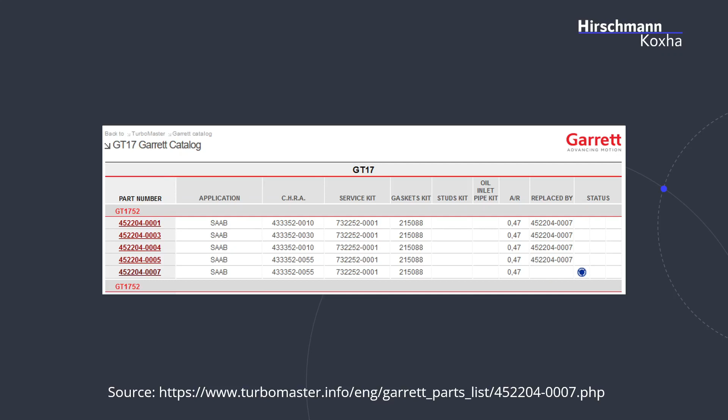Now to the basics. This is a T7 tune. And the engine in this case was a B205E with biopower, so E85, while the base file itself was made for a 2.3 liter engine. Why this matters, we're gonna see it later on. One thing you need to know about the B205E is that it comes with a GT17 turbocharger. And that thing is not really reliable at high mileage.

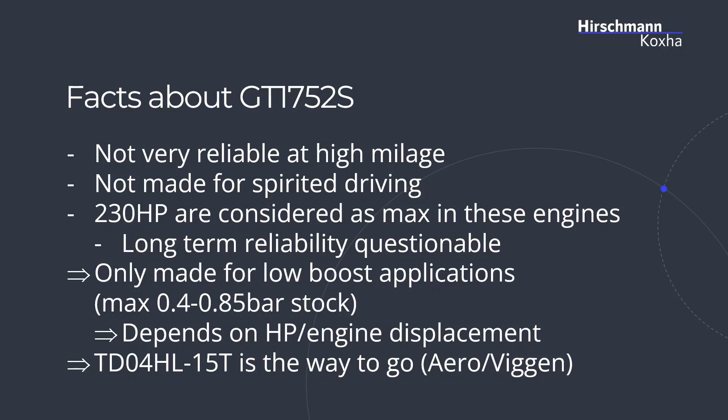It's also not made for spirited driving, or let's say for driving under high load all the time. And therefore, the general consensus is that 230 HP is kinda considered a maximum. But even then it's kinda questionable how reliable it's gonna be in the long run. Saab therefore only intended this turbocharger for low boost applications. And if you want to upgrade, or go the next step, then you definitely have to go for a 15T.

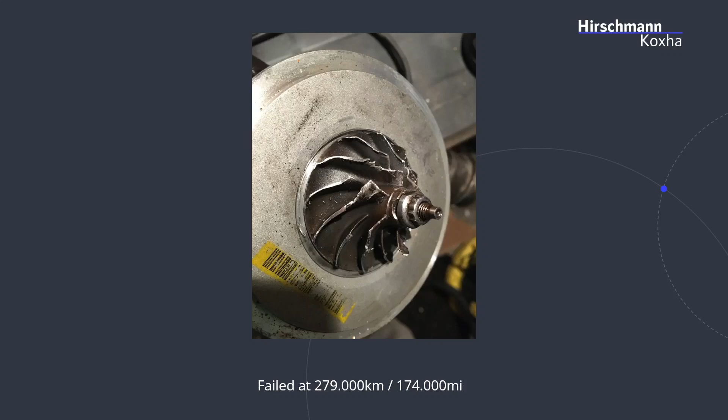Here we can see a picture of a very typical damage, which you will find with these turbochargers. This was at around 280,000 kilometers, but I actually bought a car once with around 200,000, where it was damaged even worse than that. But now to the file.

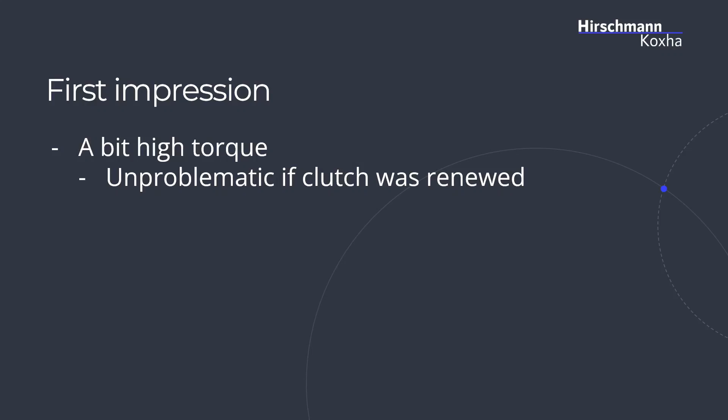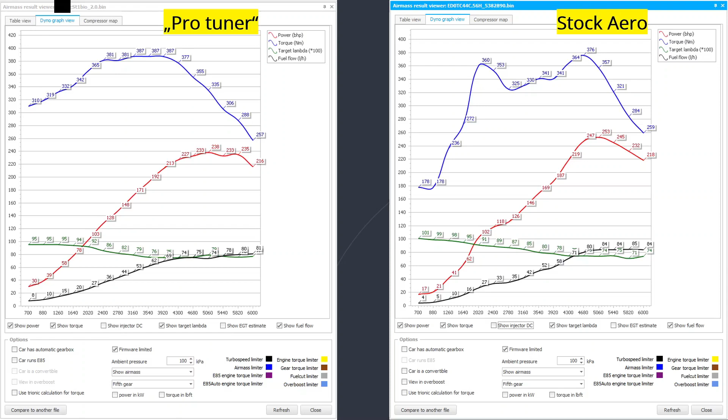And maybe now you notice a difference already when comparing it with the file on the right, which was made with a stock Aero file. Have a look how the torque starts. The Aero starts with low torque, and our file starts with 310 Newton meters already. That's kinda interesting, but we're gonna see in a minute. As said, so far, doesn't look too bad. Of course, the Aero tune must be richer, needs more fuel, because larger displacement, more power, more boost. But I mentioned this was E85 compatible, so let's see how this behaves.

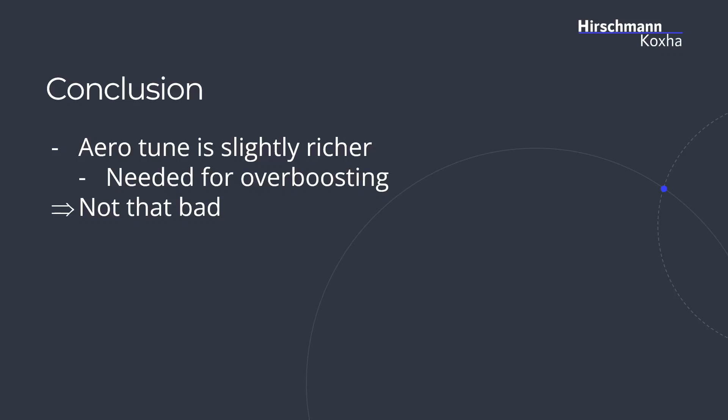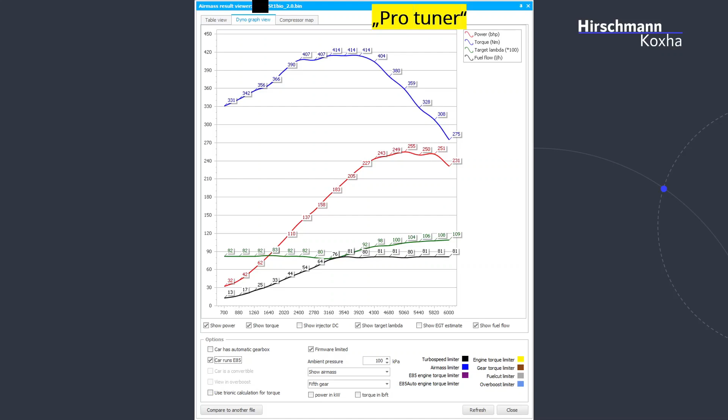But the high lambda value concerns me, because a value greater than 1 means we're running very, very lean. And at high load, we don't want to run lean, because this is where the engine is stressed the most. And of course, some of you might say now, but Ray, you were the one to tell us that E85 has a very high octane rating, and therefore doesn't knock. And that's correct. However, the burning properties of E85 are a lot different compared to petrol. So you need around 15 to 35% more fueling.

The golden rule is 14.7 parts of air to 1 part of petrol. With E85, however, you need 9.8 parts of air to 1 part of fuel. So what's gonna happen? It's not gonna knock because of a high octane rating, but it's gonna melt or burn the engine at least.

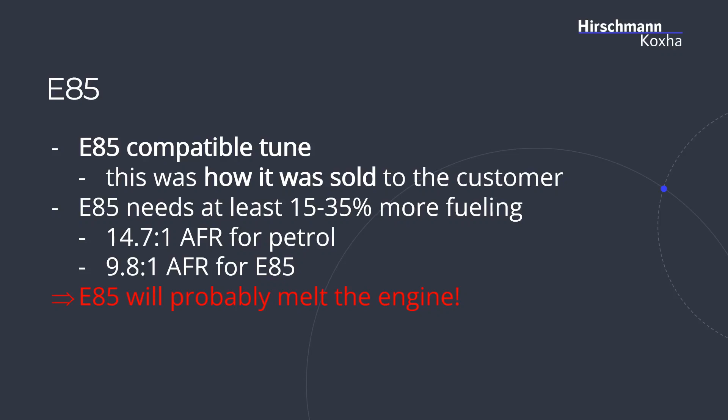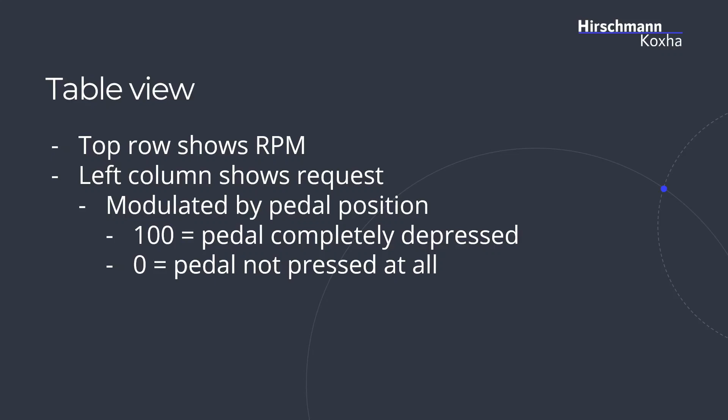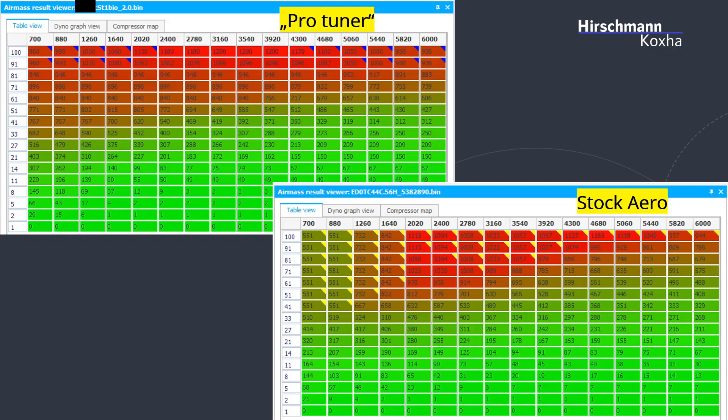As said, the Aero has the bigger turbo. And the GT17 is not really reliable, especially when tuned and the car has done its age. But what about security functions on the ECU? Granted, there are security functions which are supposed to prevent overboosting, but not if you tamper with them. And what you also need to know is that the security functions are sort of chained to each other to prevent damage. So only if this chain is still existing, they're gonna work.

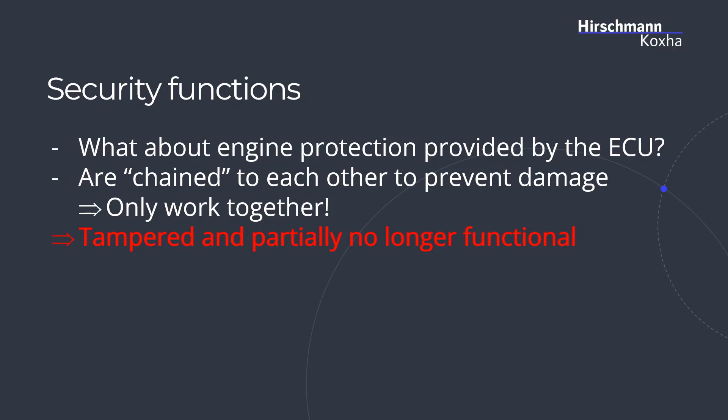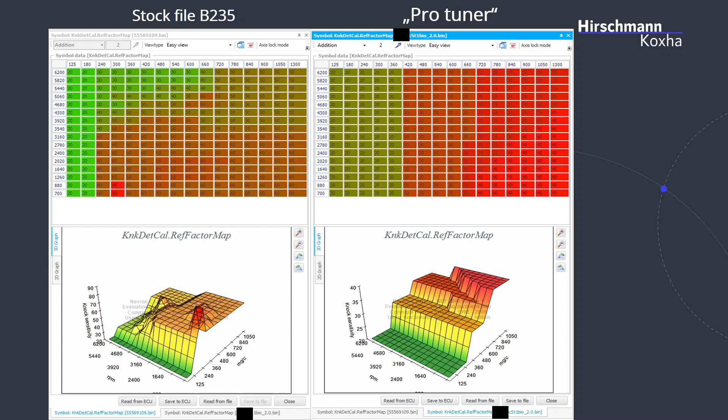First up, knock detection. On the left, you can see the stock file, the completely unmodified file this is based on, and on the right, the ProTuner. And what you need to know is that this map has basically to be based on the displacement of the engine. So the 2.3 liter knock detection is going to look different than the 2 liter one. And now you may ask, how does the 2 liter one look? Like the left one. Of course, you're going to say, no, this is a B205L. It doesn't really make much of a difference.

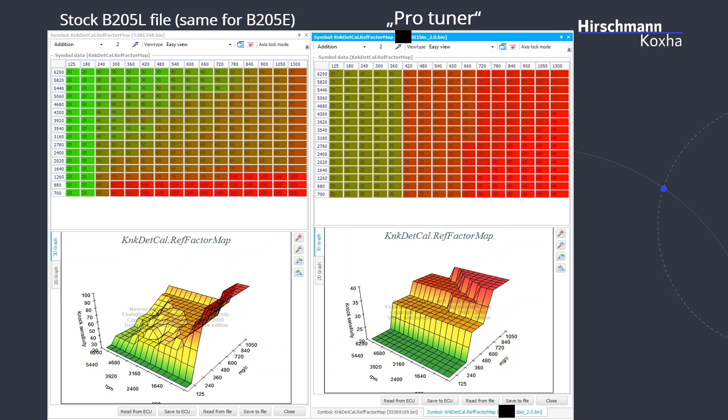If you don't believe me, don't hesitate. Get a T7 binary for a B205 and compare it. It's going to look a lot like the one on the left, but not anywhere near the one on the right. So what's my conclusion from this? The changes are completely pointless, and that's very dangerous, of course.

And to actually calibrate them, and this is another thing I need to point out here, you need specialized equipment, which is very expensive and which you can't just connect and it's gonna work. So therefore you should never ever touch these maps. Not even Hirsch has done it. Not Maptun does it. No one does it.

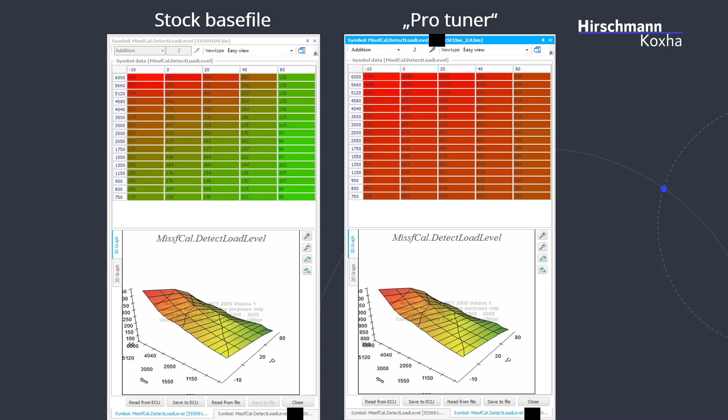Next up, misfire detection. The values in the cells are basically airmass. Left is stock, and it doesn't matter this time which displacement your engine has, and right is the ProTuner. No matter which file you're gonna open, this is also something no ProTuner is gonna change first of all, but the values will never look like the one on the right. And therefore, the misfire detection isn't able to work properly. We have deactivated, or let's say heavily reduced misfire detection, which is also very dangerous and, to be honest, very dumb as well.

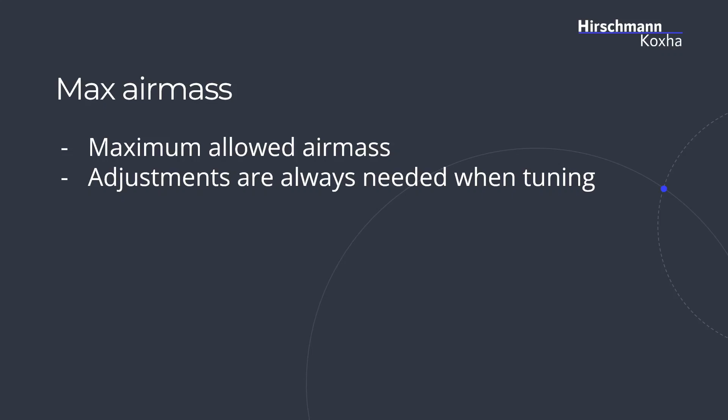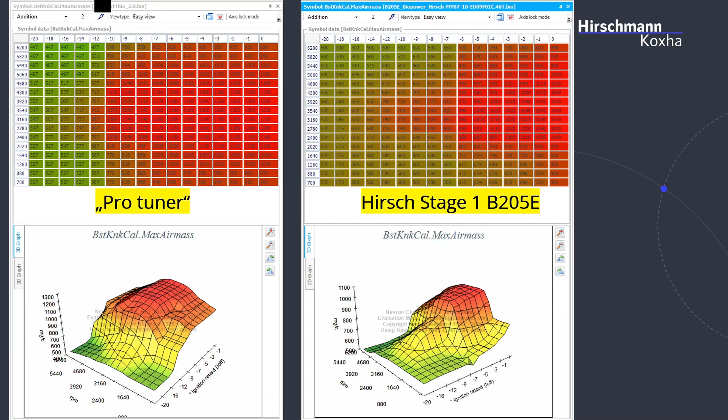But let's also talk about maximum airmass. This is a map you need to change when you tune, so it's very legitimate that they've changed it, and this is why I also didn't mark it in the very first screenshot. So you need to adjust it, right? Of course you do, but you will notice a huge difference when you compare our ProTuner to an actual ProTuner, to Hirsch. Hirsch has a very secure and safe approach with some thought in mind compared to the one on the left. And it gets even worse when you compare it with a stock Aero file.

Because you're going to realize that it's just around 50 to 80 milligrams shy of a real Aero. And when you look at the values more to the left, you're basically well above the Aero. This is really dangerous.

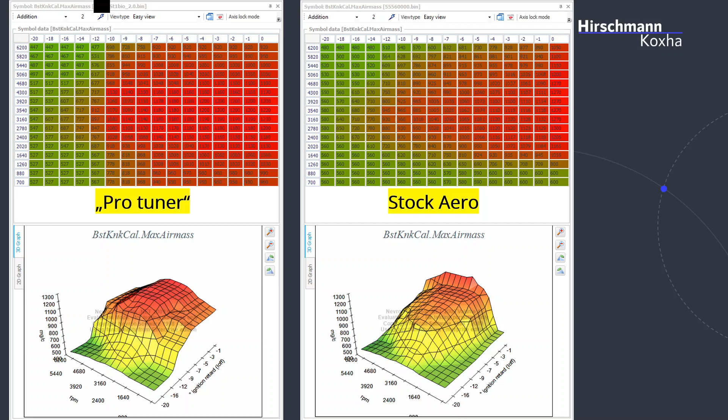The next limiter is the so-called fuel cut. How this works is that it compares the actual airmass with the requested airmass by the pedal. And there's a fixed value you can enter in a table, and if this value has been reached or exceeded, it's gonna stop fuel injection so that the engine can no longer accelerate. Sometimes you need to adjust it around 50 to 100 milligrams maximum, unless you're running a crazy build, because the stock values are already very high. And this is sort of like the last resort if all the other security functions fail.

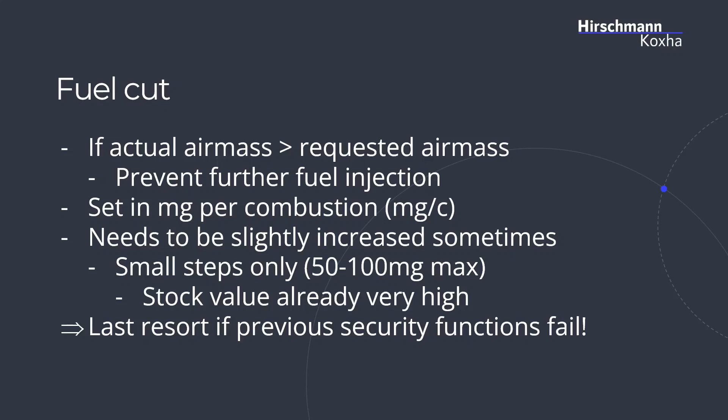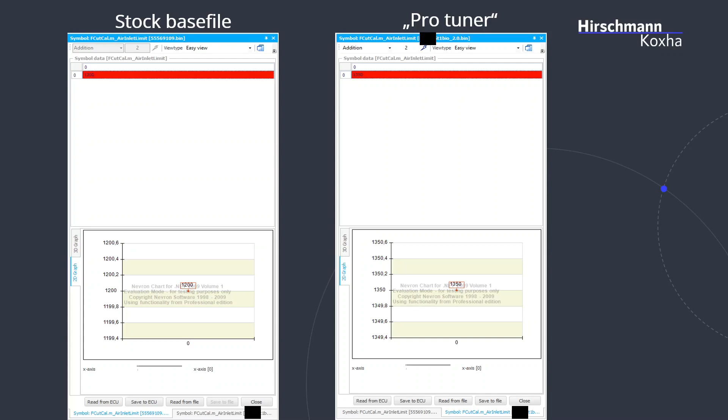Left stock, right ProTuner. 1350 might not seem like a lot, but that's actually what's used for the Aero or Viggen models. And keep in mind, the 15T can be pushed up to 1400 milligrams and it can survive it just fine, but that's sadly too much for the GT17.

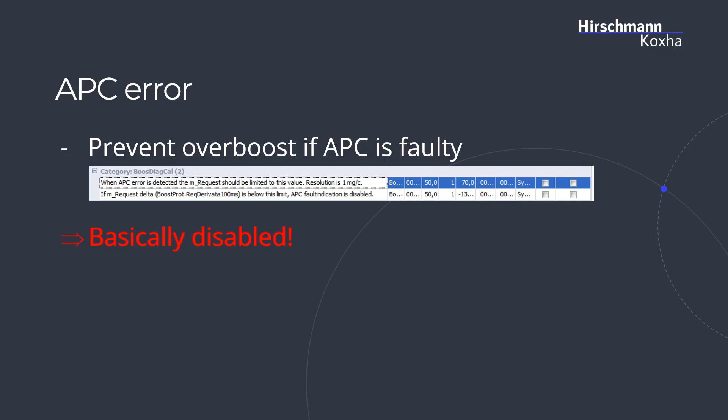The next map is basically related to the APC. And it tells us that when we have detected a fault with APC, so with our boost controller, that we should limit the air mass. And usually we would limit it to 600 milligrams. Here we set it to 1150. So we have basically disabled this security function entirely. We rendered it useless.

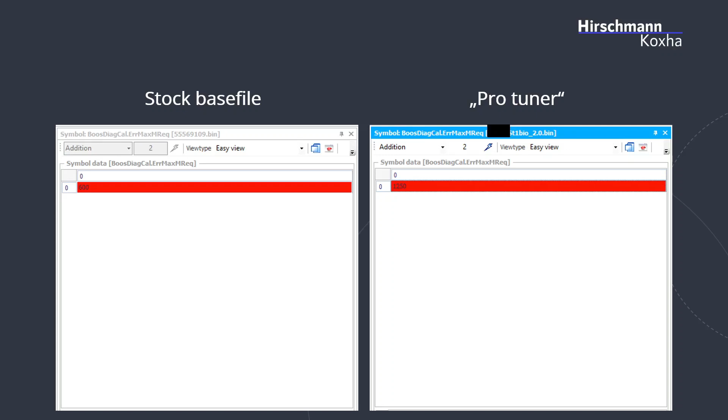But what about the actual tuning? There have been changes to the boost calibration which are needed because this calibration depends on the displacement. But in this case, they're not even factory values. They should have just copied the factory values, but they didn't do it. They set their own custom random values, which make no sense at all. And I can only tell you as much that not even Hirsch nor Maptun touch these kind of maps, because it's unnecessary. You only need to adjust this when you have a custom turbocharger.

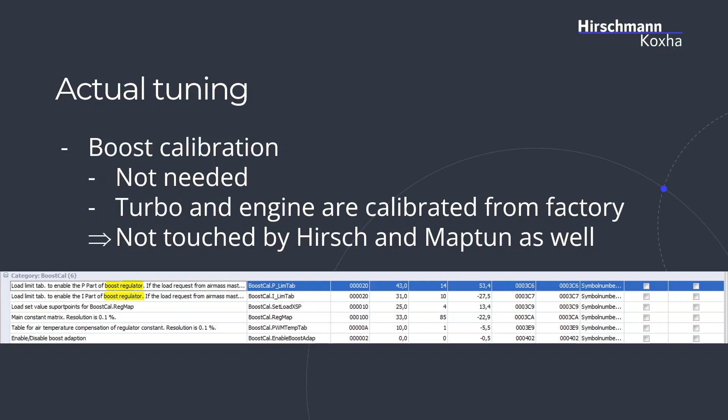What about ignition? I mentioned in my last video that knocking can be mitigated by reducing ignition timing, but you can also make it worse by over-timing the ignition. And we're gonna take a look at the ignition table next, and I marked some useless changes in the purple circle, and I also marked some stuck values in the yellow one.

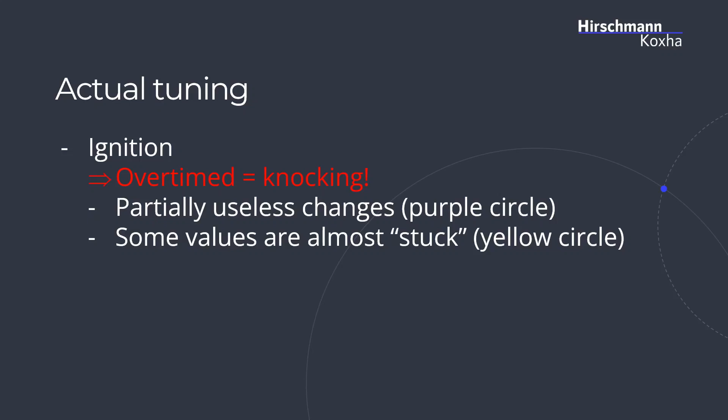And you can see that we are well overtimed with 41 degrees, because 40 degrees is the maximum you can do. And funny enough, compare the two ignition tables, left the Pro Tuner, right Hirsch. Hirsch is running more aggressive ignition angles, which translate to better acceleration compared to our Pro Tuner.

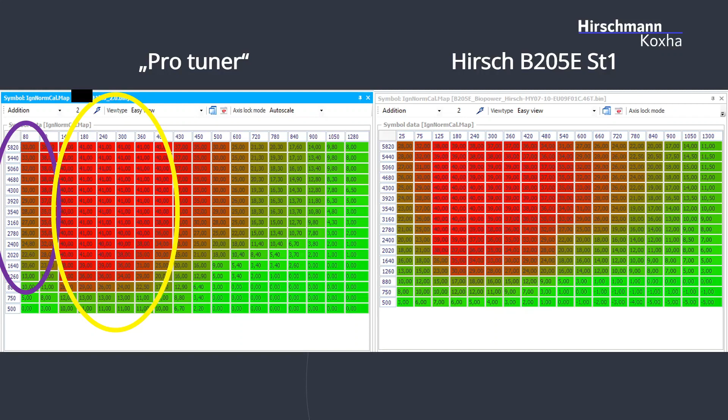So what's my overall conclusion? A lot of unneeded maps have been changed, and what's unforgivable is that security functions have been tampered or completely deactivated. And I can also say as much about this, that the vehicle owner had massive problems with his car, especially on E85, like the car wouldn't even start when it was like 10 to 15 degrees outside.

And it's not just this single person. I reviewed a lot of files, and I also spoke with other people who didn't send me the file, who also confirmed that this is a well-known problem. But when the customers try to speak with the company, it's like, no, this must be your car's fault. But obviously we can see that something isn't right with the tune in the first place. And if they mention their problems in public, they earn a huge shitstorm.

Now some of you might ask me, how many maps do you change? And this is a very good example of a stage 1 we sell, B235R on petrol. So of course we won't have the E85 maps in here. And you can see I also adjusted the fuel cut. I increased it around 50 milligrams.

And we also disabled the second oxygen sensor because the customer didn't have it. We used a very new base file, but the vehicle was pre-2002, so just one lambda. And yeah, that's about it. This is not anywhere comparable to the one we just saw.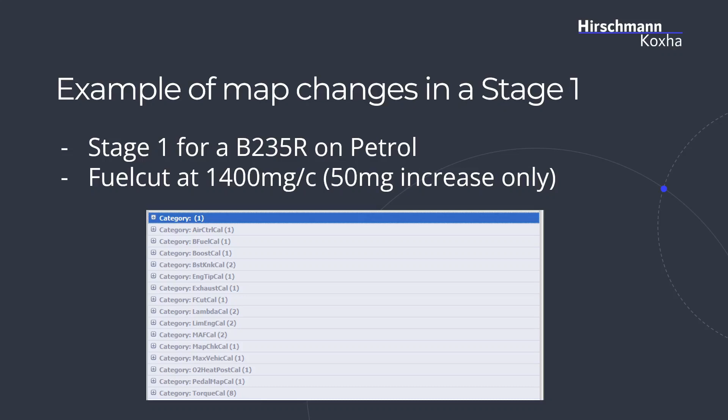Some final words to this. I reviewed around 25 files in total, and initially I had the idea that I would upload them, but then I figured it's not so clever. Simply because I don't want to point with my finger at a company and call them out, first of all, but also because I want to keep it sort of private who owns the vehicles.

But then again, I can also understand that some people might be in doubt, like, this is just a made-up story. So therefore, if you really don't believe me, send us a message and I will send you a zip file which contains the tunes, but give me maybe 1 or 2 days so I can remove the VIN and IMMO numbers. And yeah, that's all I can say and want to say about this.